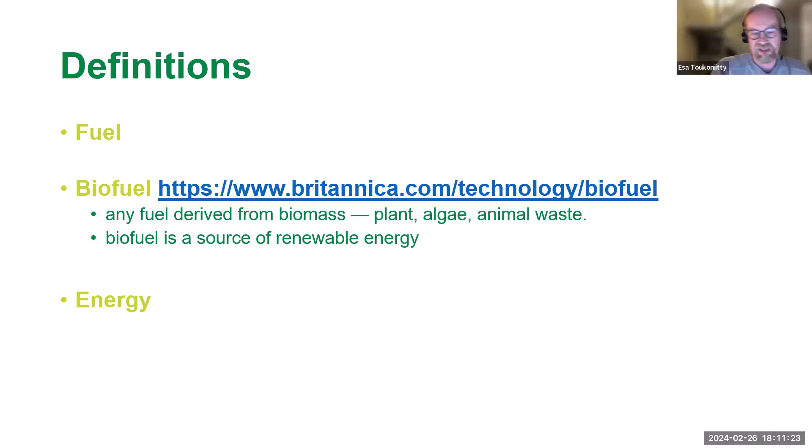it's basically fuel made from biomass, so wood or woody biomass, lignocellulosic biomass, and also animal fats and triglycerides like different vegetable oils. So that's basically the raw material pool, and fuels made out from that are more or less biofuels. Biofuels are also renewable fuels and so on. There is quite a lot of green-related terminology that is not maybe always self-evident, but just a reminder.

Also these CO2 worries and global warming and so on. So there is fossil carbon dioxide, and then there is, let's say, biogenic or originating from biomass CO2 emissions. And this is not that important, but in any case, if you have studied chemistry, elements have, not all, but most have different isotopes, and for example, carbon has isotopes 13 and 14, and some isotopes are radioactive, and usually the most stable ones are not.

And this is actually the basis for carbon dating. If you try to figure out the age of some fossil remains or something like that, you can use this same principle based on carbon 14 radioactivity. And this is actually used now when the European Union is developing methods to figure out which fuels and how much they contain fossil-based materials and how much renewable-based materials.

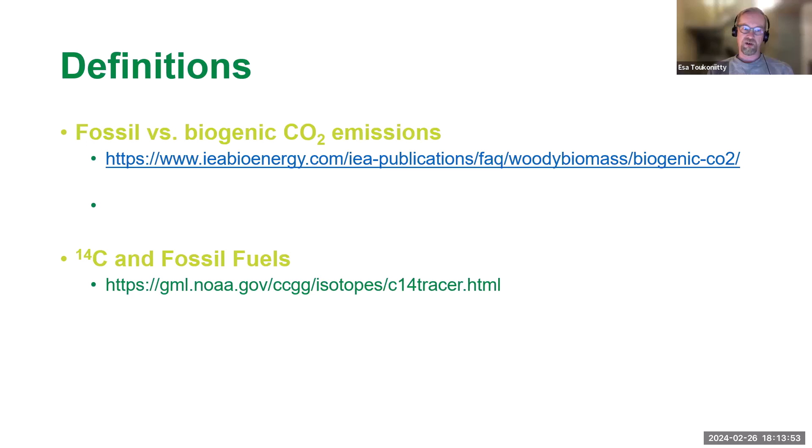But then a few words about, this is like a background, or, like the heading says, setting the scene. So the big picture in this fuel and energy sector is, I have a few slides about this, but the whole report or article is also, I think, in the supporting material if you want to study in detail all those different graphs and statistics. I wanted to just highlight a few of the, let's say, eminent facts.

And here you, for example, see the energy supply, so from which source the energy is from, starting from the 1970s, very close to our days. So one thing is that you'll see that the consumption is increasing, but you'll also see the share of different sources. Here is coal, oil and natural gas, and those are basically 80% of the energy supply and are the fossil-based ones. So at the moment, roughly 20% of energy supply comes from somewhat renewable sources.

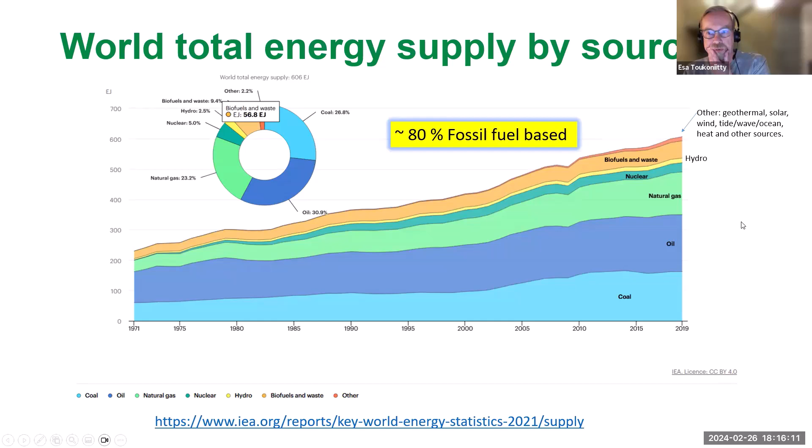Then if you take a look at the oil, which is about 1/3 of the energy supply, where it's going. To me, the key observation is that like 2/3 goes to transporting of goods and also mobility of persons. So if you add all these aviation, road transport, rail transport, and also navigation, meaning ship transport, that adds up to some 2/3 of the whole use of oil.

And there, the thing is that liquid fuels and liquid biofuels have a very high potential in replacing these. Because from what I have understood, in passenger cars nowadays we have electric vehicles that run with electricity and battery stored energy. But if we go to aviation, for example, there aren't really batteries that could work well enough for airplanes to fly long distances.

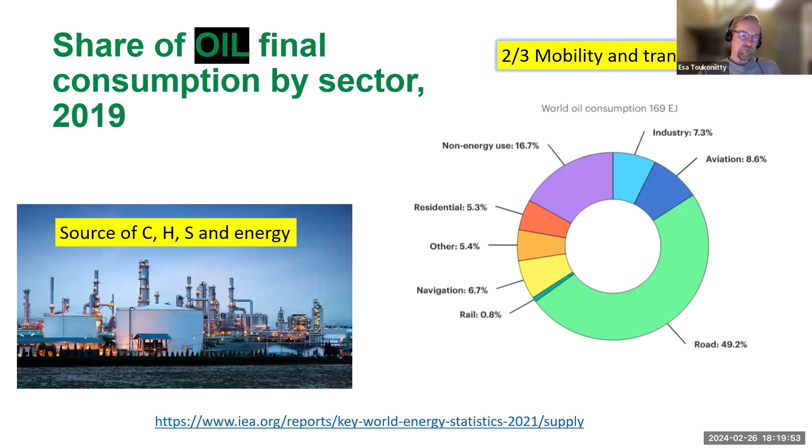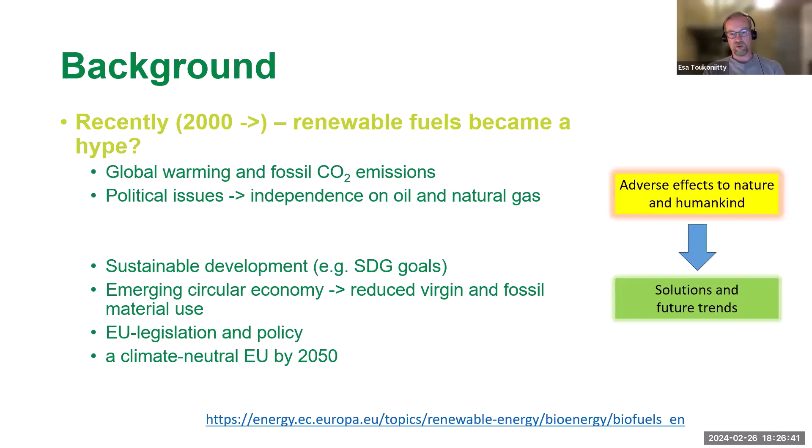And one huge driver: most or all of you are probably located in the European Union, and the EU is, or at least wants to be, the global leader in this type of green and renewable sector. So there comes lots of new legislation and new policies that favor this transition from fossil to renewables. The EU is aiming, for example, for climate neutrality by 2050 and so on. That's this type of background.

Future: these are things that are linked closely to the different courses offered by the program. So basically, we are still living more or less on the left-hand side, where the dominating energy supply is fossil-based: natural gas, coal, and oil. But these newcomers, renewable energy, biofuels, and so on, their share is increasing.

This particular course deals with biofuels, not much about that in this case. The second one is waste to fuels - a course dealing with how to replace virgin fossil materials with different types of waste fractions. That's called co-processing: the same oil refinery that basically runs on fossil petroleum can have some of its feed replaced by waste materials or biofuels, biomass. That's co-processing, and it's the trend to go at the moment.

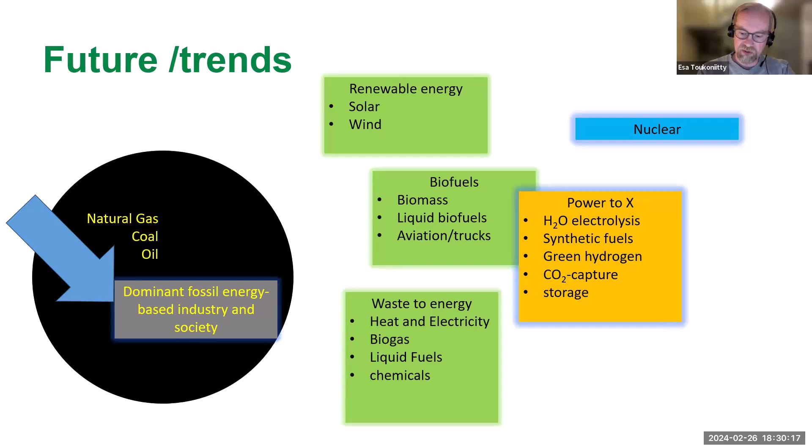Also high up is the revival of nuclear energy - it's again very popular in Europe. A new thing, at least in Finland, is the discussion of small scale nuclear reactors. So not making huge power plants anymore, but more small units for heating purposes, not making electricity, but such kind of applications.

Biofuels - this is one article that is pre-reading material, just some headings from that. It's more or less clear that biofuels can be solid, liquid, or gaseous. Of most importance and what we cover in this course are liquid biofuels - different types of bioethanols, renewable diesels, FAME and HVOs, and such things. Also pyrolysis oil. The drop-in fuels topic is covered more in the Power to X course.

I don't know if you've encountered the term drop-in fuels often, but it's basically the situation where all renewable or biofuels have to fit the current engines and distribution networks and applications in order to be viable. You cannot use a renewable fuel if the engine is not compatible, or if the after-treatment unit is not compatible. So it's the good old oil refinery and fossil fuel industry that has set the standards and quality requirements that new fuels have to live with. That's basically the drop-in fuel concept - you can make whatever nice bio things, but if your car doesn't work with it, it's not that useful.

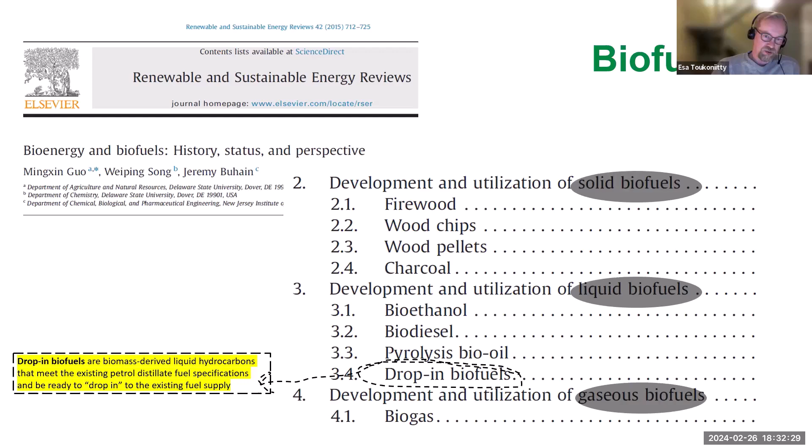Still some background. Oil refining is still the dominating era - it started more or less after the Second World War, in the 1950s. So it's a very old industrial sector, but it's so huge and important that it's difficult to replace. Even with all these bio and renewable things, it can be very challenging to replace the volumes and the amount of energy, chemicals, and products currently made from fossil-based raw materials.

Interestingly, when I started doing research in renewable or green chemistry areas - I'm talking about the beginning of 2000 or end of the 1990s - the oil industry was really the hype, and nobody thought about using bio-based materials for anything. When the bio-based industry became hype again in the beginning of the 2000s, many of these research processes and reactions were already invented before the oil refining era. They just couldn't compete with the cheap oil and the amounts or energy needs at that time.

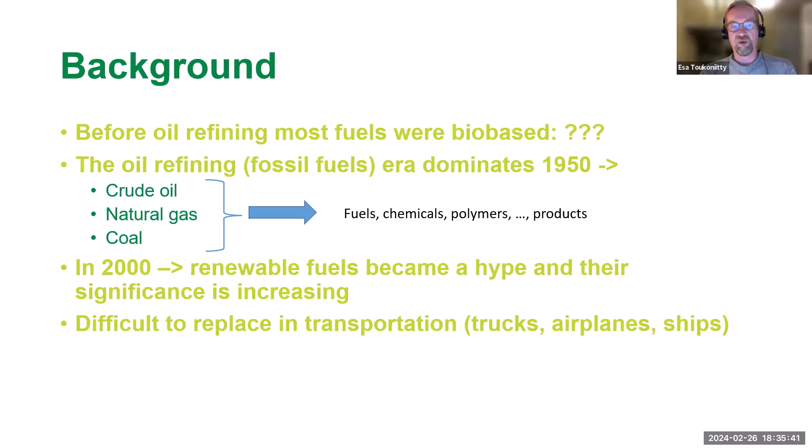I've already mentioned this in many instances, but it's something to keep in mind: the problem of replacing hydrocarbon fuels with anything, even renewable like electricity, is problematic in airplanes, trucks, and heavy machinery. Otherwise, renewable energy can be more easily applied.

I have been talking quite a lot now. Are you still there? Any questions maybe?

I have a question about the publication you showed before - I was wondering if it can be uploaded to the material for the course. Yes, I have uploaded it there, but I think it's in section 2 or section B. So, sorry, you'll get access to it very soon.

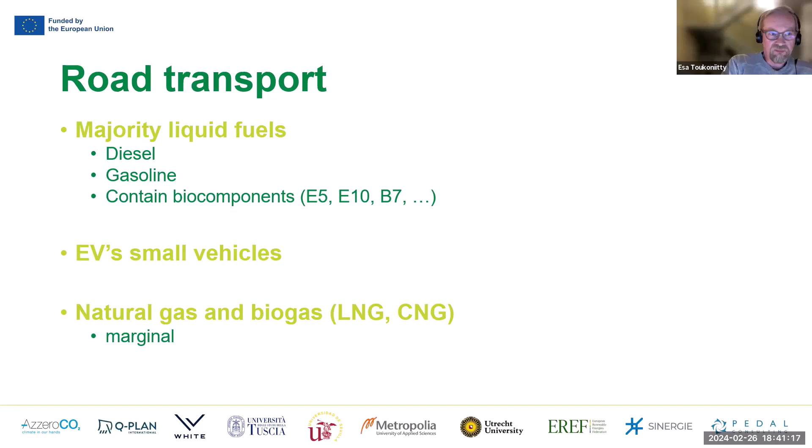Here is the same info about fuels in different sectors. Fossil fuels tend to dominate - diesel and petrol are the largest, and biofuels, at least according to these statistics, cover less than 10% of the use today.

We'll come back to this later in assignments, but just keep in mind that gasoline itself, what you put in gasoline-driven vehicles - E95 or 95 octane or 98 octane gasoline - is not one single component, but a mixture of several hydrocarbons and some additives that have been tailored in the oil refinery blending station. When you talk about bioethanol, that's one single molecule and one single chemical, but when you talk about gasoline or diesel, it's a mixture of hundreds of different chemicals.

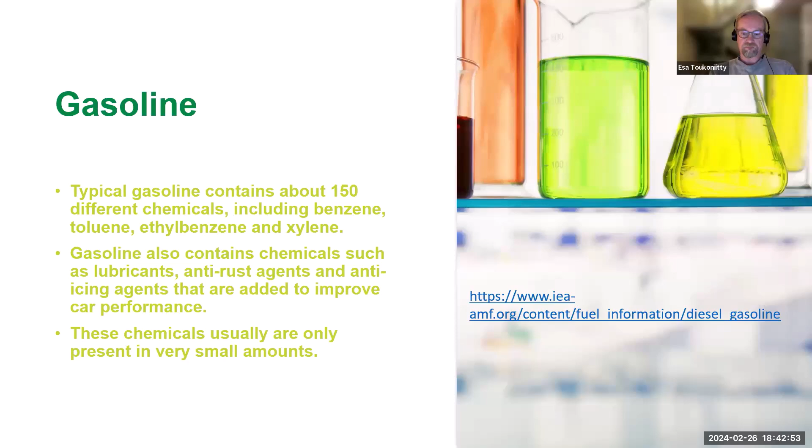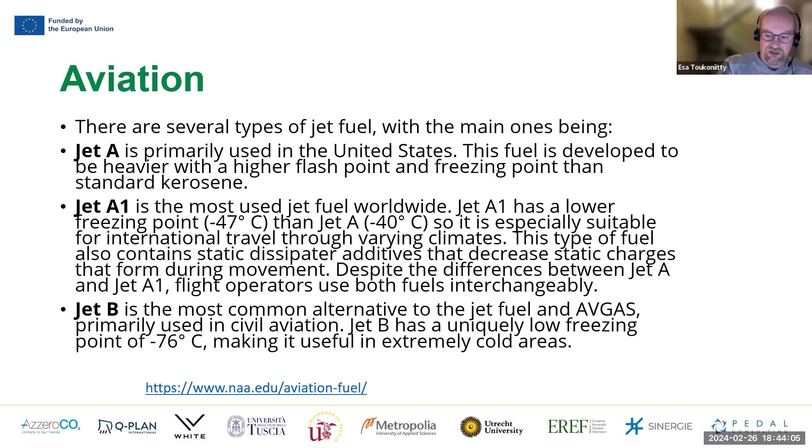The same applies to diesel, but aviation also uses hydrocarbons as fuels, and I'm not an expert on that. I just took some examples - there are understandably heavily standardized fuels used in airplanes. There was some information last week in the news about Neste, a Finnish oil refinery company that produces renewable jet fuel, but the market is still very small due to higher prices and so on. I think it was very marginal, less than 1 promille of renewable fuels used in aviation today. Like I said, I'm not an expert, but one can say for sure that airplanes run on fossil fuels.

Another area that runs on fossil fuels is shipping - ships that transport goods all around the world. They use the most heavy and most polluting oil fractions usually as fuels, because those are the cheapest ones - heavy fuel oil, or sometimes called bunker oil, which is basically solid material at room temperature. In order to pump it into the ship, it has to be heated to quite high temperature to become liquid.

I have also worked quite a lot with Wärtsilä, a Finnish diesel engine manufacturer, and they are focusing on renewable fuels in the shipping industry. For example, liquefied LNG is becoming quite a popular alternative. I've also heard that methanol could be retrofitted to current diesel engines - there are some corrosion problems, not with the engine but with pipelines and other things, since methanol is much more corrosive than traditional hydrocarbons. Also hydrogen is used in some ships, and ammonia could be a potential fuel too. All of these, in principle, could be made from biomass - well, liquefied natural gas of course is not as such from biomass, but hydrogen, ammonia, and methanol could be made.

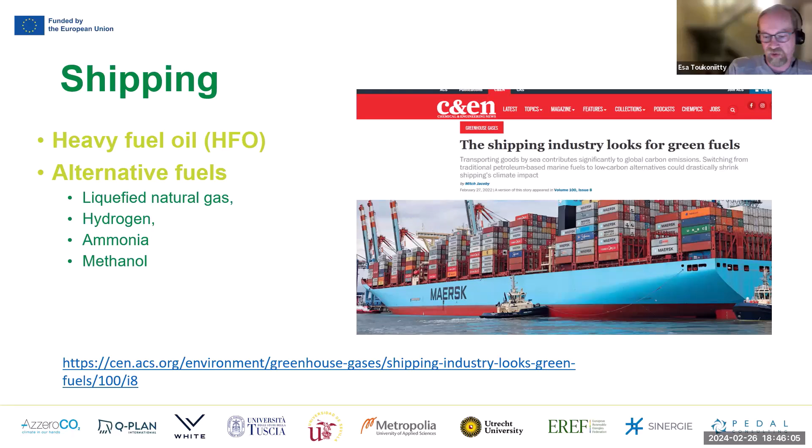I'll see that I'm starting to repeat myself quite a lot, but the fuels as such, you can group or categorize them in various ways: solid, liquid, gases, and based on the raw material, renewable or fossil based, and then also natural or synthetic. And of course, the possibilities in synthetic fuels is much higher in number than the natural fuels that could be used as such.

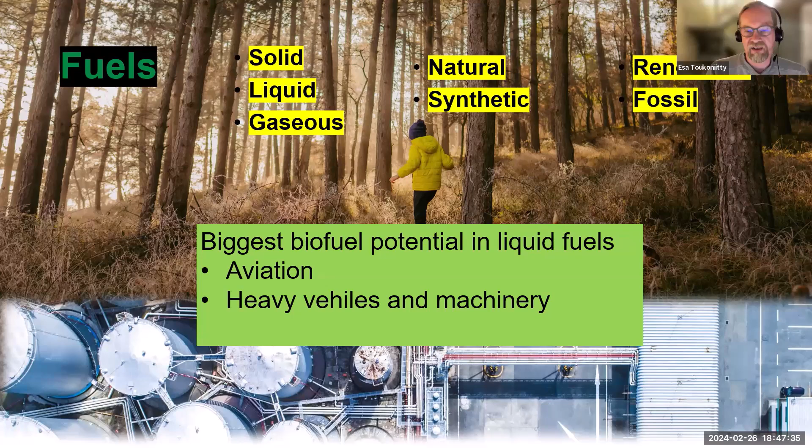But this lower part of the picture refers to oil or fuel storage tanks, and that refers to the synthetic part. So keep in mind that whenever dealing with fuels, we deal with bulk chemicals, very large volumes, thousands of tons or liters usually. It's a classical example of bulk chemical industry.

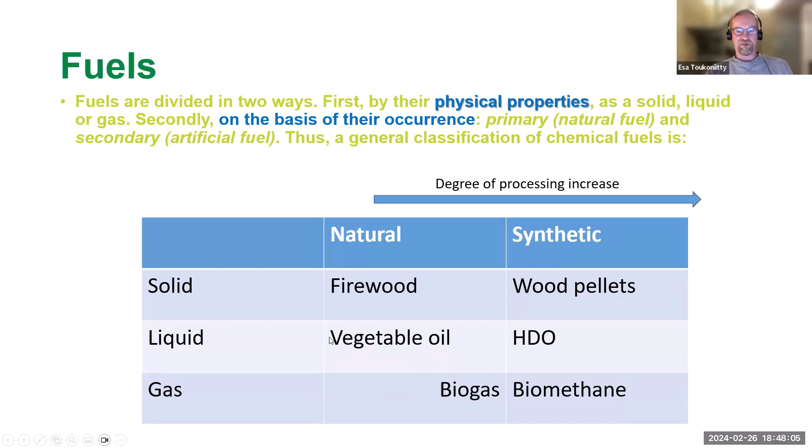Here is nothing new, it was just an example that you can find. Actually, I struggled a little bit to find a natural liquid fuel, but then I remembered that some diesel engines can run on pure vegetable oils after certain modifications, but otherwise here is nothing that special.

I already touched this fuel composition a bit, but if you think about the fuel that you are using in your car or some application, the most common thing today is fossil-based fuels, which are complex mixtures of different components, hydrocarbons, where the energy comes from, and additives that improve certain properties of that fuel: the combustibility, provide lubrication to pistons or stability, or increase the storage time, etc. Then there are some chemically single component fuels which are also available.

Examples being like ethanol, methanol. These are just single chemicals or molecules, and the fuel is made basically purely out of those. And these could be from fossil or bio-based origin.

More typically, the fuels that we use are blends of fossil and bio components, like petrol and diesel. And then in addition to this, there can be pure bio-based fuel mixtures. So there is, for example, the HVO, hydrotreated vegetable oils. It's compatible to diesel, but it's purely made from bio-based or renewable materials. But it's not one single compound, it's a mixture of several hydrocarbons.

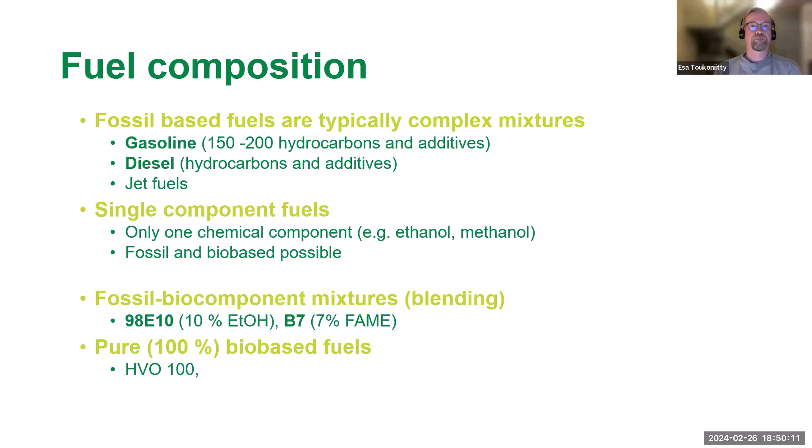So there are properties that are difficult to solve with, let's say, batteries and some other alternatives. This is of course the diesel, gasoline, kerosene compatibles could be made from renewable sources, and this energy density is their strong plus side in their properties. So if they have to compete with battery technology, it's definitely the high energy density that is on their side.

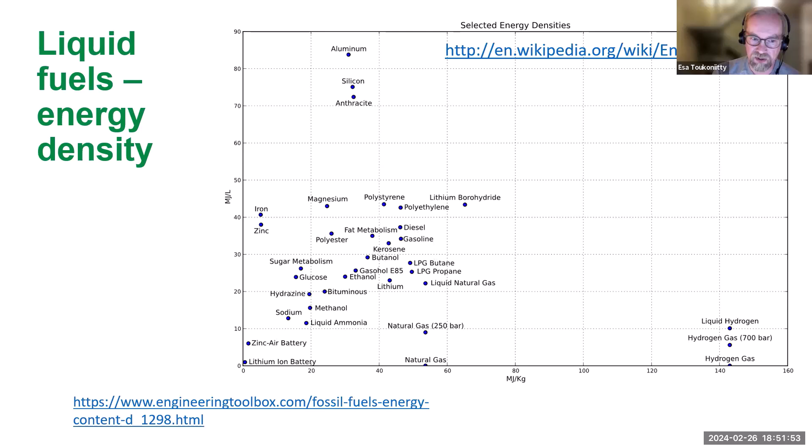This is often used also: does the infrastructure exist for the distribution? If you think about hydrogen, very few cities have pumping stations for hydrogen, so therefore nobody buys a hydrogen-driven vehicle for their everyday use. So there is this problem to consider. Last but not least in this list is the compatibility. Is it compatible or is it standardized? Can it be used in a flexible way in current vehicles, for example?

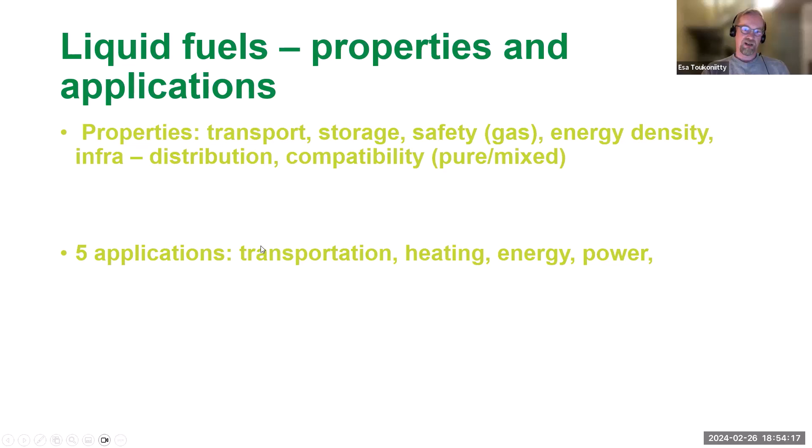And in this course, we are mostly interested in this mobility or transportation related applications, but of course all liquid or biofuels can be used for heating, for producing energy, for producing power and such. So it's not any limitation, but there are cheaper alternatives available, so the best value addition is in this transportation sector.

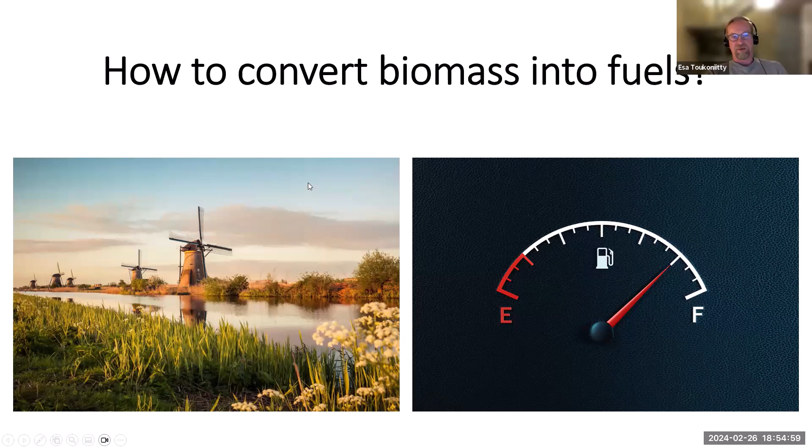This is just a picture to remind you that when we talk about biomass to fuels, we often see these greenish pictures of nature and trees and clean environment, but in order for it to be realistic, it goes through this bulk chemical industry, which is extremely large scale wise. So it's not done in small scale, the production.

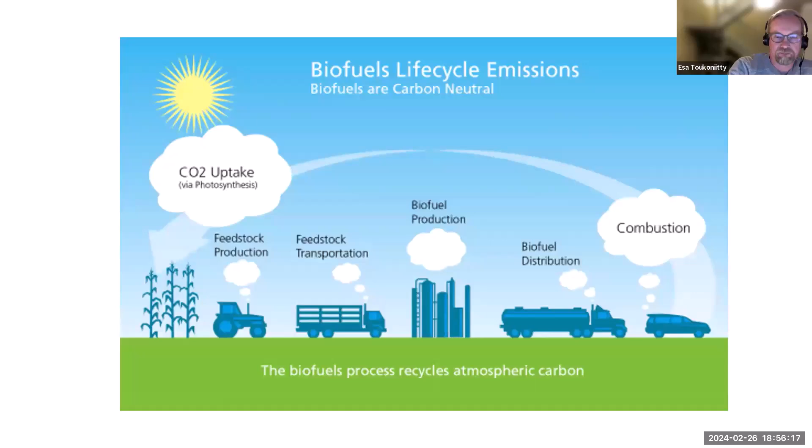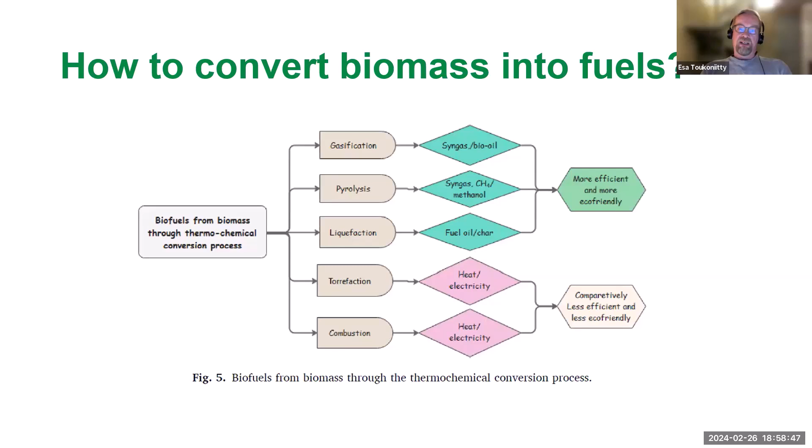The second possibility is thermochemical conversion, and on this course, gasification, pyrolysis, and liquefaction are maybe more relevant. Torrefaction and combustion are in this graph more for heat and electricity production, so that's not what we are aiming at on this course.

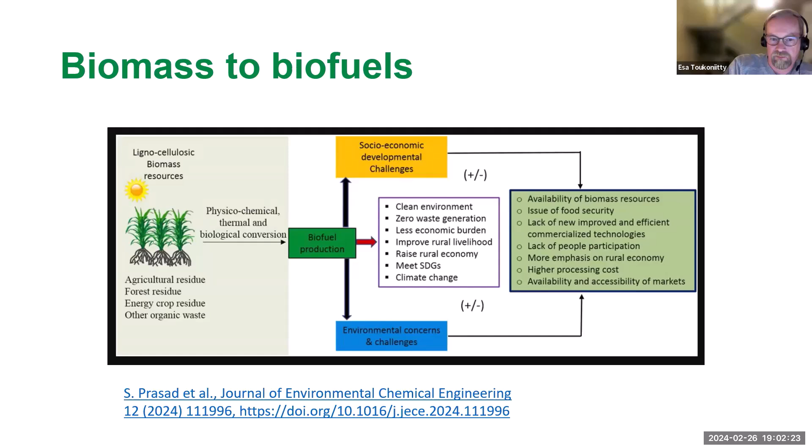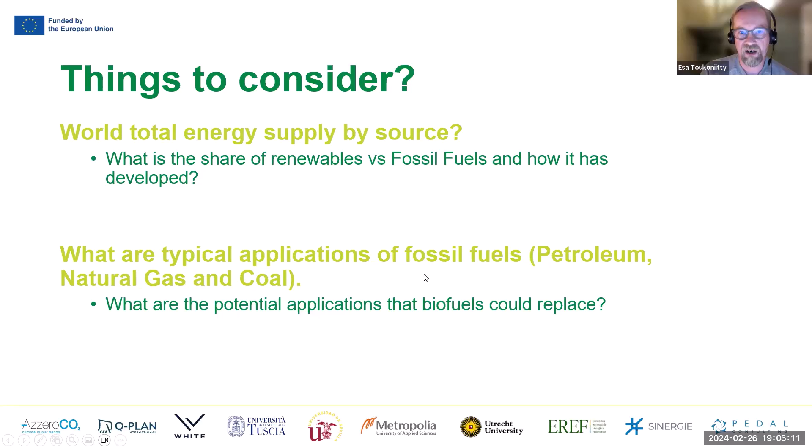Then for the coming lectures and parts of this course, keep in mind what are potential applications for these different types of biofuels. So what fossil alternatives those could replace, because the use of biofuels doesn't make sense in all applications. Biofuels are not the one single solution for all the problems, but, let's say, one tiny piece of this whole renewable sector. So many other solutions are needed, and those have to work together to solve the problems.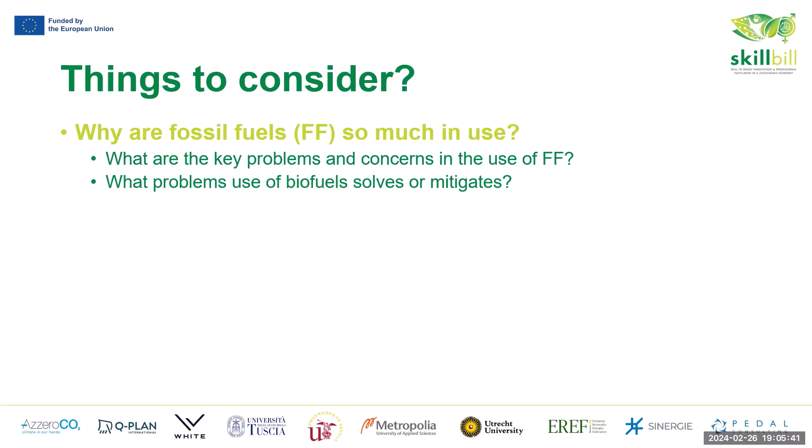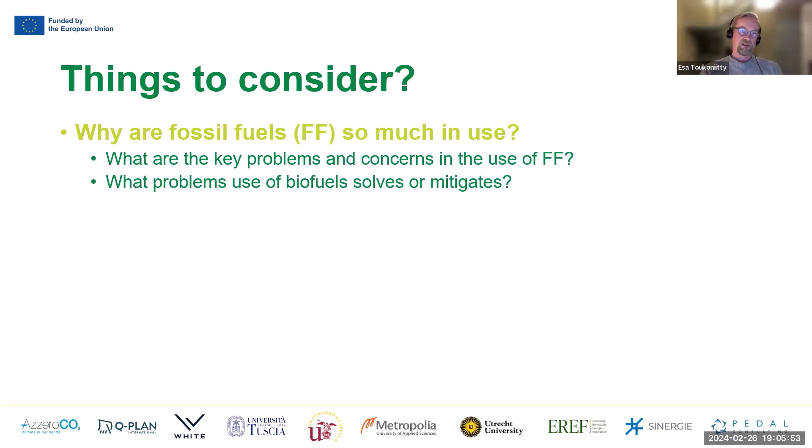And then I didn't talk much about the key problems related to the use of fossil fuels. But one might try to reflect on the problems of fossil-based materials versus what solutions biofuels offer or mitigate. And biofuels are not solutions to all the things.